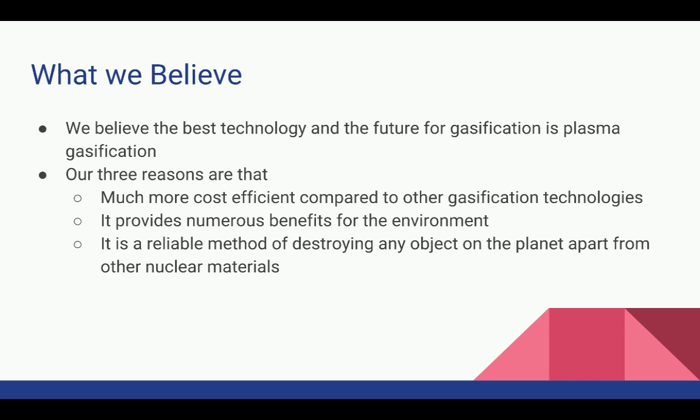We believe that the best type of gasification system would be plasma gasification. Plasma gasification is cost-effective compared to other gasification technologies, an efficient method of removing our waste, and finally it is self-sustainable and can provide energy.

Firstly, plasma gasification is an efficient method of removing our waste. Depending on the size of the plasma gasification reactor plant, lots of waste can be processed per day. For larger plants, almost up to 300 tons of municipal solid waste per day. The time for plasma gasification is shorter than other alternatives dealing with garbage and waste. You don't have to build a place for dumping the garbage every time it is full, as the plasma can heat up and break down the molecules of the waste very fast.

And since it does not take a long time to break down the municipal solid waste, lots of garbage will be able to be processed every day with the plasma gasification reactor plants. This is important for our system today because nowadays there are more and more people, which means more products are being used and more garbage is produced. If we can't deal with the garbage as fast as it is produced, it will start snowballing and there will be more garbage piling up in the future.

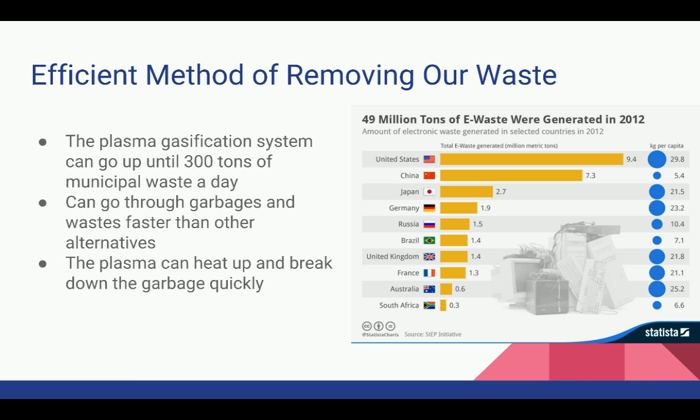Secondly, plasma gasification is a cost-efficient method compared to other gasification technologies and economically beneficial for the city. Plasma gasification produces syngas, and the components of syngas can be used to make other carbon-based industrial chemicals such as ethanol, which can be used in ethyl alcohol, pure alcohol, grain alcohol, and drinking alcohol. It can also be used in hand sanitizers and medical wipes.

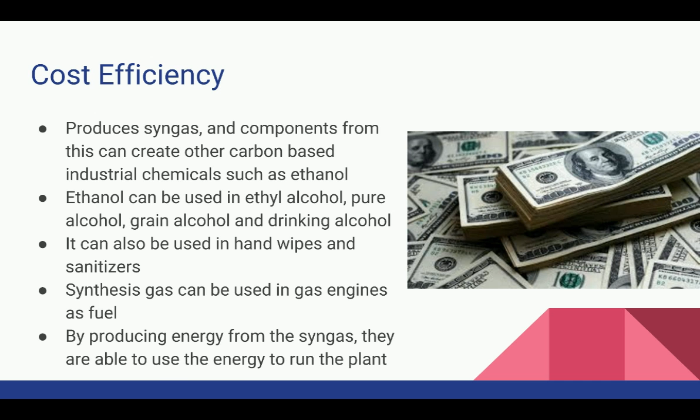Other than ethanol, synthesis gas itself can also be used in gas engines as fuel. It can reduce the energy cost for fuel and further predictability and stability. Also, by producing more energy from the syngas, they use the energy to run the plant. One common application for syngas is electricity generation. The syngas can undergo a combustion reaction and release energy which can be captured to transform liquid water into steam. The steam then drives a turbine and thus generates electricity.

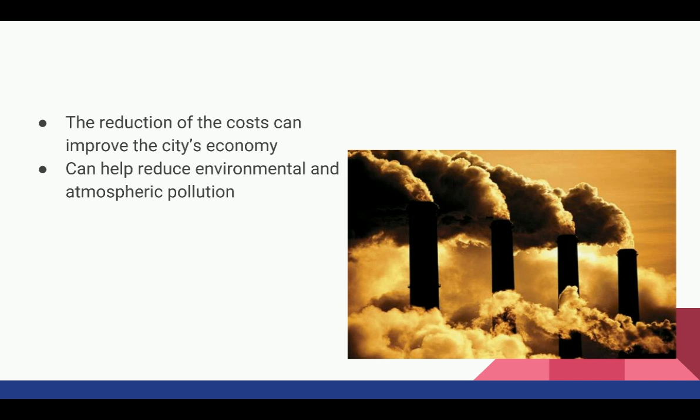The amount of electricity produced from a typical plasma gasification plant far exceeds the energy that is required to operate it. The excess energy can then be used as an additional power source for the city. The reduction cost of different products can improve the economy of the city, and it also helps reduce environmental and atmospheric pollution, as to make many of the industrial chemical gases, fuels are burned, therefore causing pollution. The excess electricity produced from the syngas can be used as an additional power source, and in the long term will pay off the initial investment made to build the plant.

Lastly, plasma gasification is self-sustainable and can provide energy. The syngas produced by plasma gasification is able to create more energy, which is able to self-sustain and even provide to the town. Large carbon-based molecules and plastic decompose into the syngas, which is a mixture composed of hydrogen and carbon monoxide. More than 95% of the mercury can be removed from syngas. After cleaning up syngas, they send it to the boiler, which uses internal combustion engines or gas turbines to produce power to further convert the syngas into chemicals, fertilizers, or fuels.

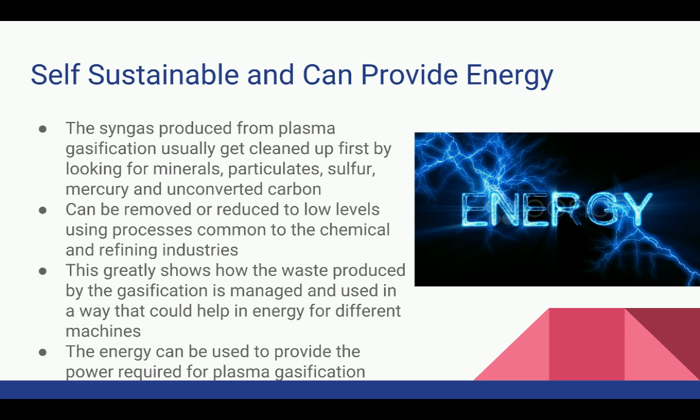This shows how the waste produced by the gasification is managed and used in a way that could help in energy for different machines. The energy can be used to provide the power required for plasma gasification, while the extra energy can be sent to different places for running other machines that will require energy. The difference between plasma gasification and other methods is plasma will be able to produce energy for itself and doesn't require other energies or expenses to deal with the waste.

Some may say that plasma gasification is not environmentally friendly, but they're wrong because most of the dangerous and toxic substances are removed or cleaned up during the cleaning process of syngas. Plasma gasification does not produce pollution to the atmosphere. More than 95% of the mercury will be removed during the process. Even if toxic compounds such as dioxin are produced, they will be cleaned up by removing or reducing toxic substances to lower levels.

Plasma gasification will not be producing carbon dioxide since gasification does not involve combustion, uses little or no oxygen, and it converts carbon-based materials directly into syngas in a closed reactor with high temperatures. Plasma gasification is definitely safe and environmentally friendly to process waste.

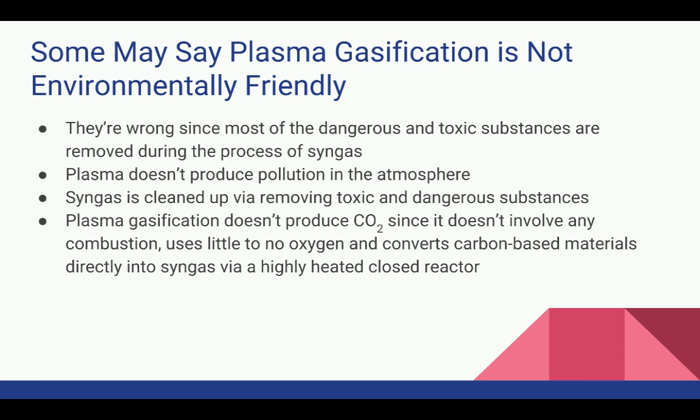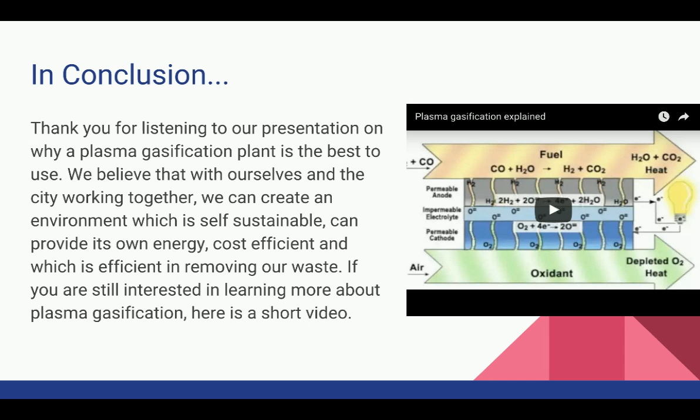In conclusion, thank you for listening to our presentation on why plasma gasification is the best type of plant to use. We believe that with ourselves and the city working together, we can create an environment which is self-sustainable, can provide its own energy, cost-efficient, and efficient in removing our waste.